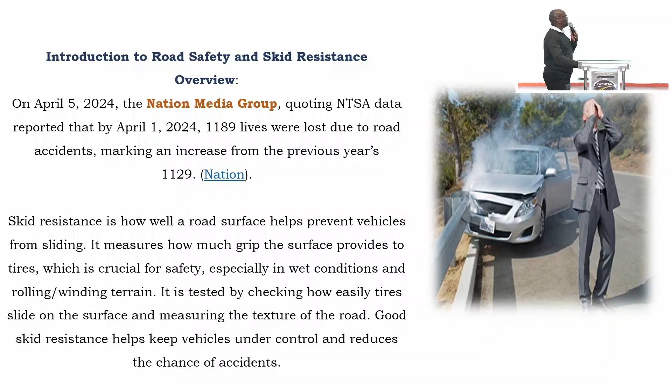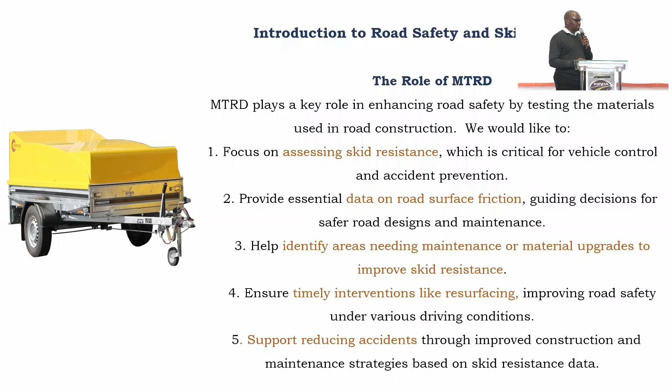And we are saying as MTRD, we are able, together with the roads authorities and other implementers, to map out or to determine the issue of our pavement. We are looking at the skid resistance of our pavements. We are looking at getting the data on friction and identifying areas which require intervention in terms of the levels of the skid we are experiencing, and that intervention to be done on time. And that calls for collaboration between all of us so that the intervention is done on time.

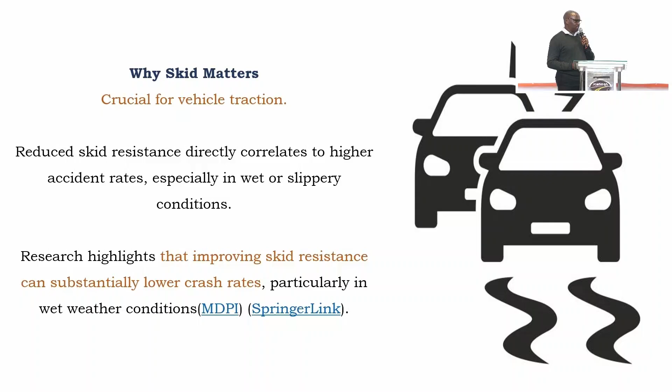Then you ask yourself, why is skid crucial? Why is it important for us to determine the level of skid of our pavements? We are saying until we are able to control or manage that vehicle in terms of a sudden event on our road, then we are likely going to get into an accident. But if we are able to control that vehicle when something suddenly happens ahead of you, then we are in control of that situation. Therefore, if we can improve on that skid, if we can improve on that surface, then we are able to address that element of accident in our environment.

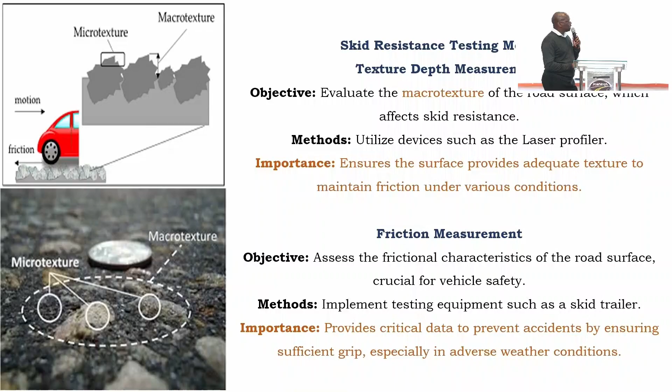And we are talking about various methods of determining the level of our surfaces. We are talking about getting the resistance using laser profilers, using a skid trailer to determine the level of our pavement. And we are looking at both the micro and macro texture. The macro texture is the one which will be so critical when we are addressing a road in a wet condition, because we are looking at where that water will be so that our tire is still in contact with the aggregates or the riding surface. So if we have very minimal macro texture, your vehicle will literally be floating on that water surface, and therefore you may not have adequate control on our road.

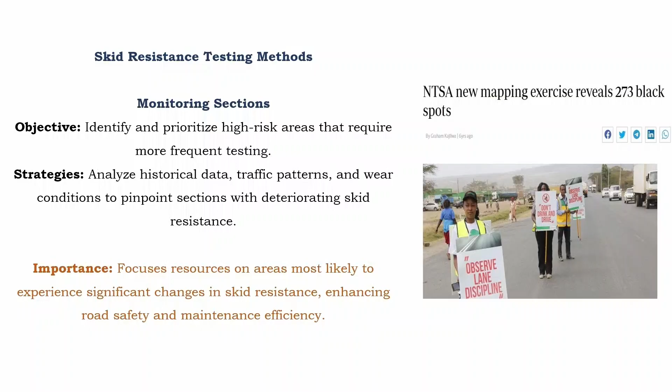Now, we need to be able also to monitor and to map out specific areas of interest, which we normally call the black spots, but these are areas with high prevalence of incidents and accidents. And until we narrow down exactly to what causes this, we most of the time will blame the driver, the carelessness of the driver, the state of the vehicle, but we forget the road surface itself might be contributing to that risk.

And therefore, we need to map it out by narrowing down on these areas we call the black spots and check on the texture of these particular sections so that we may say, in addition to the vehicle itself, in addition to the driver, we also have a component of the road itself which is contributing to these fatalities and accidents. And we are saying we can put resources together in terms of enhancing the level of our roads.

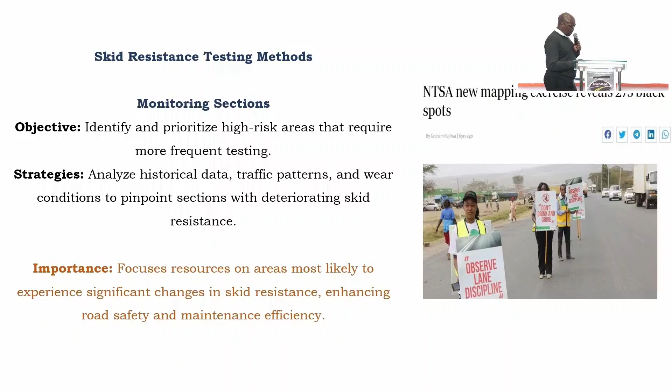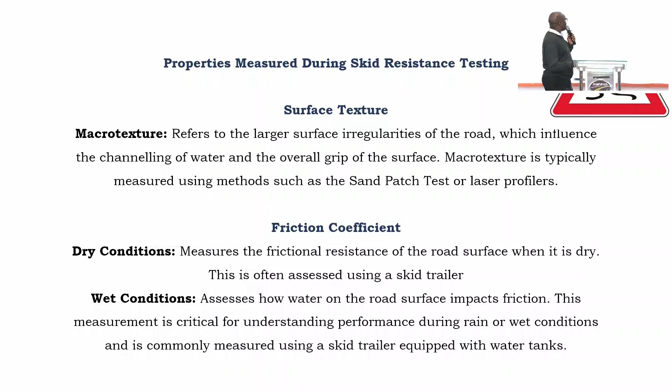This can be done by considering both the dry and wet condition. And most of these accidents will happen in a wet condition. We are not ruling out accidents in dry condition, but part of what we check is the nature of the road and the status of that road when the accident occurs.

From the design perspective, we are looking at the shape of the aggregates themselves in terms of allowing the passage of water when it is wet and still providing a grip on the surface. We are looking at the size of the aggregates themselves. A fine mix will always be risky because there is no area to allow the water.

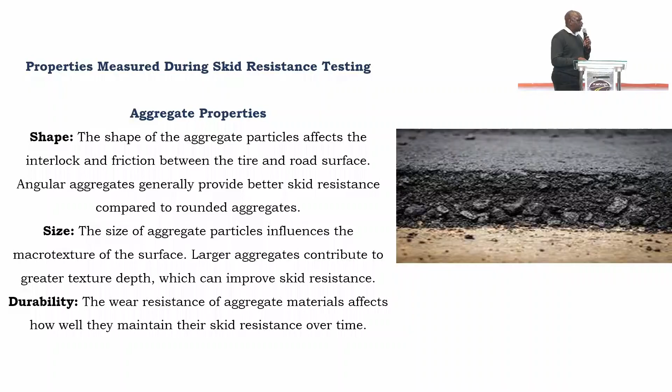And we are looking at the durability of the aggregates themselves. Polished aggregates will be smooth and therefore they will not provide grip, and skid will be an issue in place. So we look at the shape, the size, and the durability of those aggregates. And that's why we have those provisions when we are doing the mix designs.

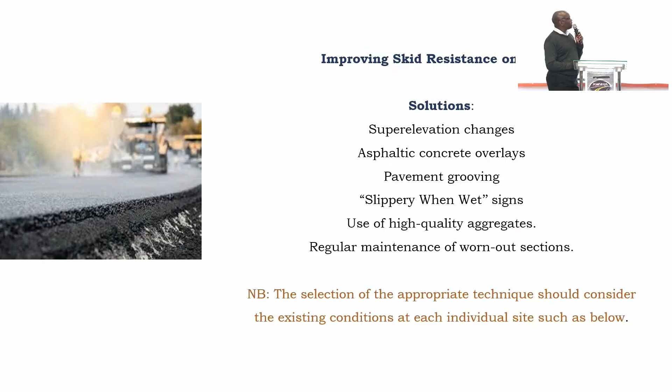And therefore, we are also looking at solutions which are available. We can look at superelevation changes, when we have terrains. We are looking at asphalt concrete overlays, pavement grooving, "slippery when wet" signages, and use of high-quality aggregates. Of course, including regular maintenance of our sections, so that we may be able to control the grip on that road.

We also look at the climatic conditions. That means we are looking at the level of wetness of our surfaces to determine what kind of pavement we are looking at. Not only looking at the bitumen, we also look at the aggregates, the sizing of the aggregate depending on where we are doing our roads. We look at the volumes of the traffic and their composition, knowing that you require a bigger grip when you are addressing a heavy vehicle than a light vehicle. Again, we look at the speeds. These are elements we need to consider in our overall design.

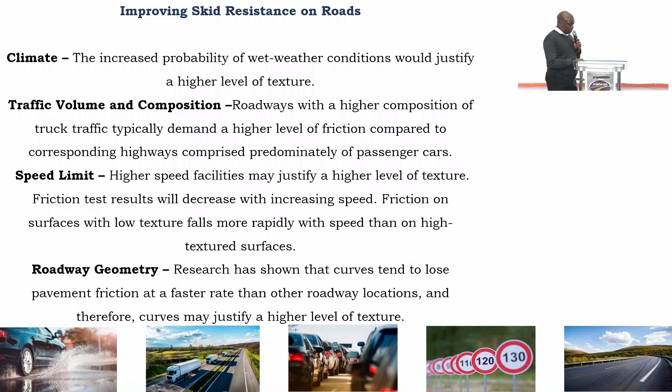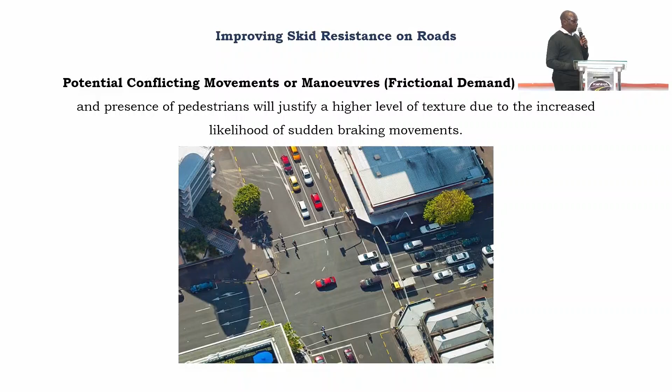Most of the time, we just do a mix design and we look at the temperature just to pick the bitumen. We ignore the aggregates as a factor of safety. Then, of course, in our road geometry, signages are critical. We look at potential conflict movements, where you expect to have sudden braking. Junctions are areas where the pavement wears out very fast. These are areas we need to improve on in terms of safety when we address our designs and our construction.

Now, for us to be able to do all that, to map out and to have enough data, we are talking about the pavement and material management system, which we've developed at MTRD. This brings on board the nature of our roads in terms of the evaluations we've done and the condition of these pavements. We have that information for mapping, and we can actually tell which areas are experiencing very low skid resistance, and those areas can be correlated with the accident information we have

in terms of the fatality areas. This information, if put together, including what is available at different authorities and entities, can help us to put resources together to develop a comprehensive information system which will be able to advise us on areas where we may need to do some intervention, and these interventions to be done on time. If we take advantage of this, identifying the skid-prone sections, then we'll be able to predict deterioration of these sections and make appropriate intervention on time. Because saving a life is better than acting when the accident has taken place.

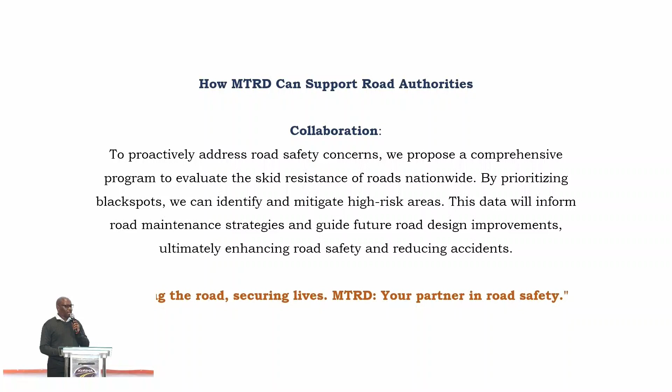For this to continue, we're looking forward to collaboration in terms of mapping what has already been identified as black spots. We do skid resistance on these sections, in addition to other sections, so that we may be able to pinpoint the exact cause of fatalities in these areas, because we have similar areas with similar configuration, and yet we don't have the same number of fatalities. So the key might not necessarily be what we classify as human error, but it could also be a design issue right from the beginning.

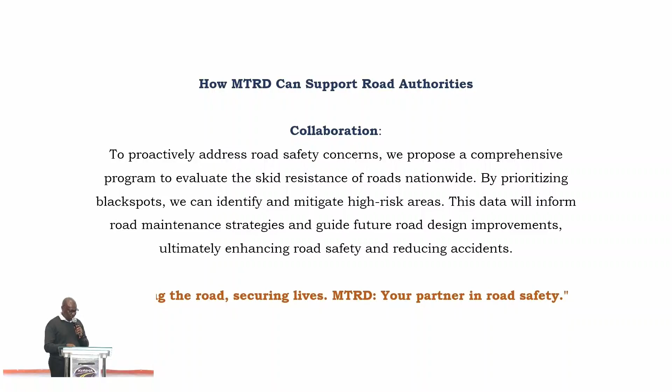Not forgetting that even a new pavement has its own cycle. Once you do a new pavement, the skid might be low, but over time, maybe within 2 years, when the aggregates are properly exposed, you have the highest grip. Then from there, it again starts to go down as polishing takes place. So those are the cycles we need to understand, then be able to map out when to intervene in a particular section, so that we don't wait for the accident, but address it before it takes place.

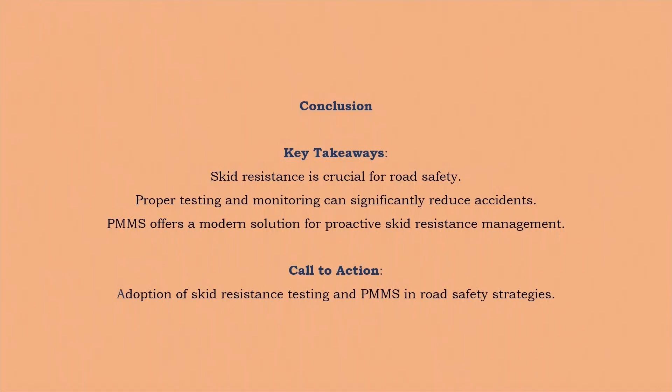And therefore, for us, the missing dot which we need to connect is partnership and use of ICT in the development of our roads, with our motto that we look at quality and safety as MTRD.